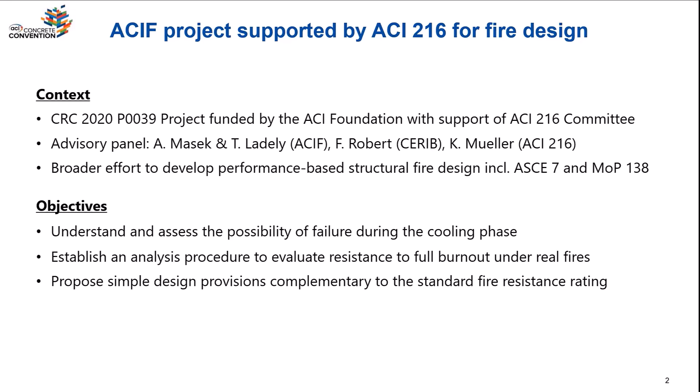So why care about the response during the cooling phase? This is a new need arising from the emergence of structural fire engineering, because real fires include a cooling phase.

Most specifically, in performance-based structural fire design, the first step is to define performance objectives for the design. That's a change in paradigm: we're not just taking a deemed-to-satisfy solution, but talking with stakeholders, the building owners, in defining what is the desirable performance of the structure. We can have different types of performance objectives, including survive to full burnout, or even being reused after a fire, and some resilience objectives.

At the same time, we recognize that failure during cooling can happen. That's true for any type of building material, primarily because of delayed heat transfer. There are other effects too: strain reversals, further degradation of strength, etc.

Primarily, once the heating stops, the inside of the sections, the core of the structure, will still continue heating for a while, and so the load-bearing capacity continues to decrease. We've observed in real fires some structural collapse during the cooling phase.

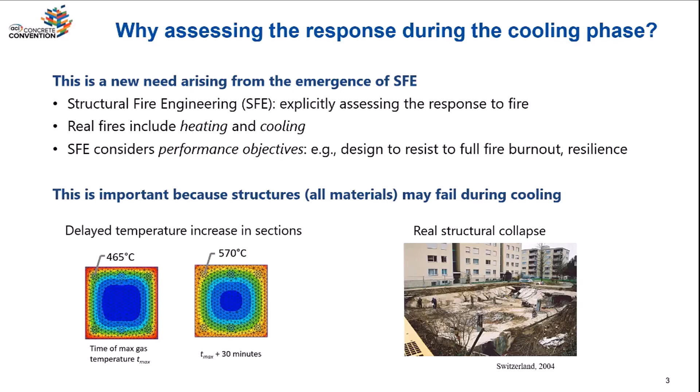So what do we need for this assessment of behavior during cooling? First, we need to start collecting data on the properties during the cooling phase. For a long time we focused on elevated temperature properties, but now we want to know also the residual properties after cooling - this has already been done to a certain extent - but also the properties during the cooling phase, for which we don't really have data.

So we need new experimental protocols, and material models and provisions that we can use in our numerical simulations. We need data on the response of members during the cooling phase, so we can use simulations, when we have the material data, to model the structural response throughout the fire exposure.

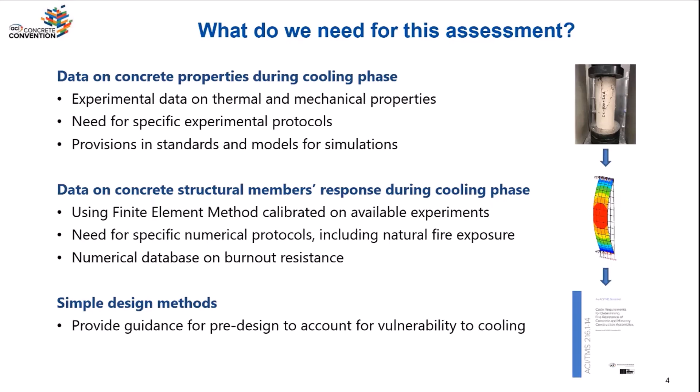With that, we can collect data on burnout resistance, which I'm going to define in a moment, and then look at simple methods or pre-design tables that would give provisions for addressing the vulnerability to the cooling phase for achieving burnout resistance. So in the first phase, we started with experiments collecting those material properties.

We looked at different concrete mixes and designed two types of tests. The first focused on thermal properties - we wanted to measure thermal diffusivity during heating and cooling. Then we also looked at compressive strengths.

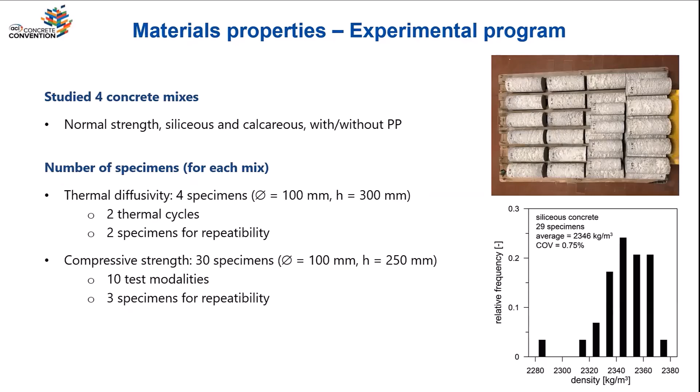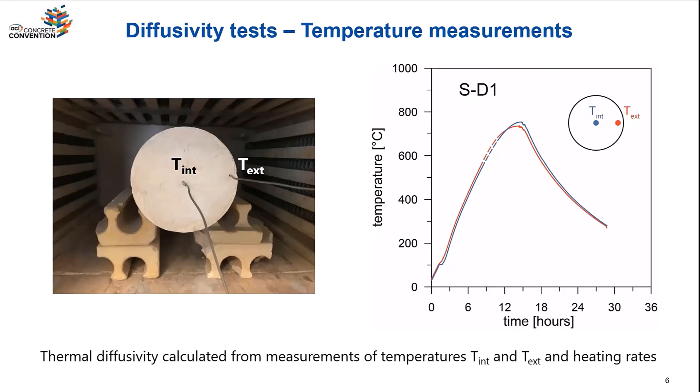For the thermal test, we looked at measurements of temperature in concrete cylinders. By measuring the temperature at two locations inside the specimens, and looking at the conduction problem there with axis symmetry, we could derive the thermal diffusivity. What was important here was to monitor closely what was happening not only during heating, but also during cooling. Thermal diffusivity is a material property that includes conductivity, specific heat, and density, and is the key driver of conduction in the material.

This plot shows the outcome of those thermal diffusivity measurements. On the left part of the plot, all this part is the heating phase, up to this vertical bar. You can see those curves relate to different specimens.

So we measure the thermal diffusivity continuously during heating. And then here on the right-hand side, you have the results when we return back to ambient temperature. So a couple of things we can see here. We have those big peaks, linked to moisture effects around 100 degrees C, and here it's the effect of quartz. So these are already known.

And in heating, you have provisions in standards, notably in the Eurocode, there are two curves that bound the behavior. And so we see that the trend basically follows these laws. It's not exact, with some variability, but overall what is in the standard captures the variation of thermal properties during heating.

However, what was new was this right side of the plot, and what we found was that the thermal diffusivity was irreversible. We didn't have the same type of variation during cooling that we had in heating. Basically, the curves are almost horizontal, meaning those thermal properties are not recovered. They keep the values they had at the maximum reached temperature.

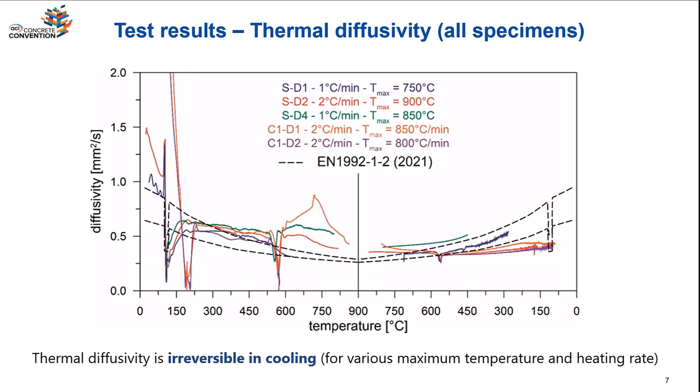So next, experiments dealt with compression tests, compression strengths. The test protocol that we devised included defining two important temperatures for concrete cylinders. The temperature Tmax is the maximum temperature that we will reach during the heating of the specimen. And then the temperature T-test is the temperature at which the test is performed.

So if you look at the column at the right here in this table, this means we'll take concrete cylinders and heat them to 600 degrees C. Some of them we will test at 600 degrees C, so that's the elevated temperature measurement as is usually done. But others we will heat to 600 degrees C, wait for a while, cool down to 400 degrees C, wait for the temperature to stabilize, and test at 400 degrees C. We do the same at 200 and at 20, and 20 is the residual strength measurement. So that we track the loss of strength during cooling and the residual value.

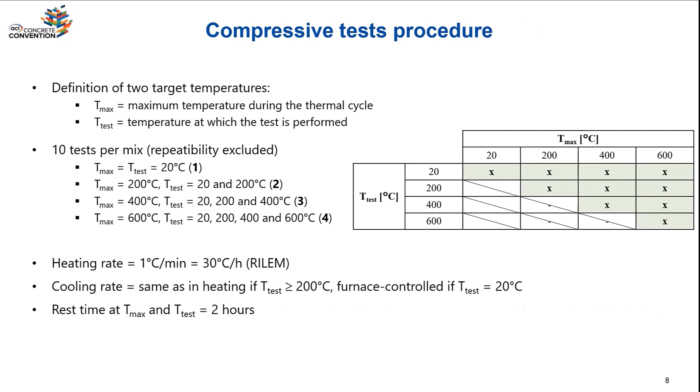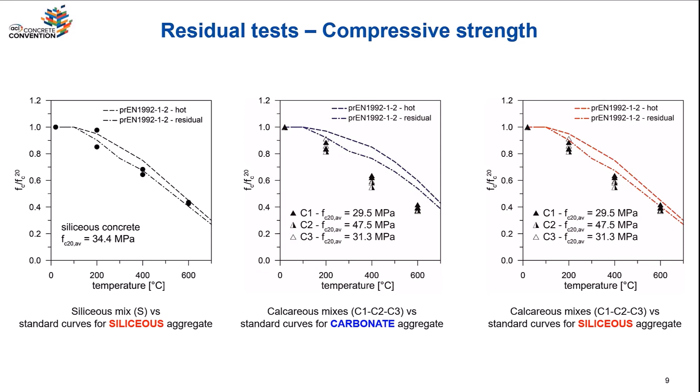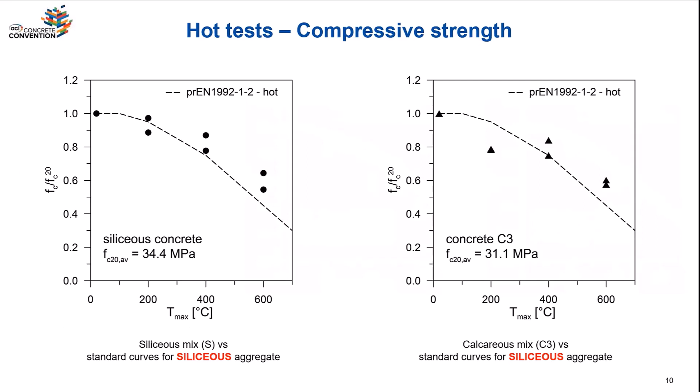So these measurements are the hot measurements at 600 degrees C, and then we are cooling and measuring at 400, 200, 20. You see again that the residual strength at 20 is lower than the hot value, and that's true for all specimens. But you see that the trend while cooling is not really consistent, or we couldn't find any real logical trend between the different mixes. So we always had further degradation of strength, but it was not a linear process.

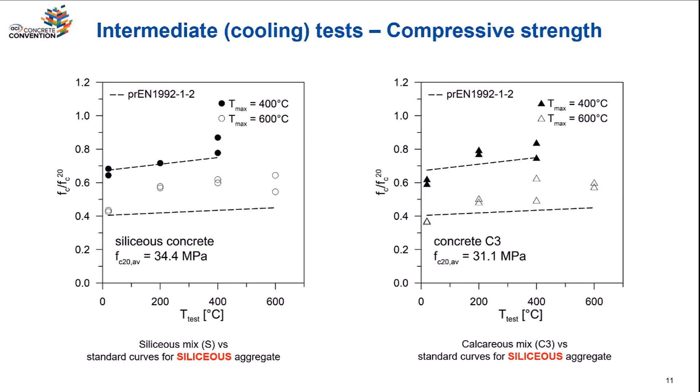So on the experimental program, the main takeaway is that the thermal properties in the heating phase are fine with code provisions, but in the cooling phase we should consider them irreversible. So if you do a numerical simulation, you should keep the value at the maximum reached temperature, not at the current temperature while cooling. And for compressive strength, the residual value is lower than the elevated temperature value.

We have additional strength degradation during cooling, and we believe for the first time we had measurements during the cooling phase at different intermediate temperatures. More research is needed to understand really what was going on, we didn't find a really consistent trend.

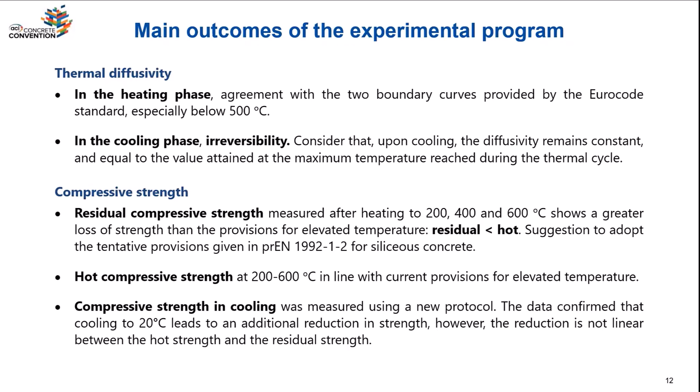Moving on, next we wanted to simulate entire concrete members during heating and cooling, and the way we framed the question was to determine what we call the burnout resistance. So here is what we wanted to do: if you consider a reinforced concrete column in a furnace, traditionally we heat it up to a certain time when it fails, and that's what we call the standard fire resistance.

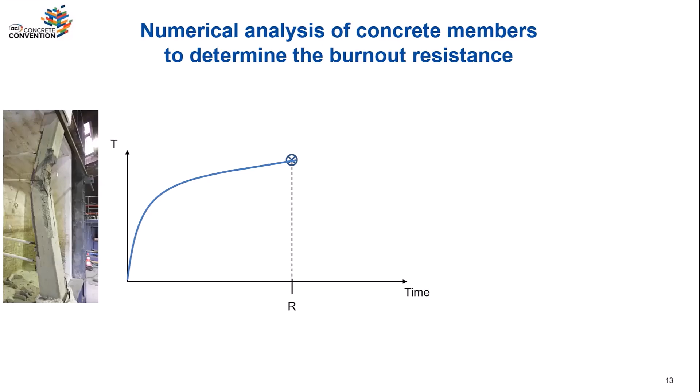The question we want to look at is, should we stop the heating earlier but keep the load applied on this column? We stop at a time earlier than standard fire resistance, and then there is a cooling phase. Would the column survive or fail? We want to repeat this analysis for different values of DHP, duration of heating phase, and differentiate between the fires that lead to failure and the ones that are survived.

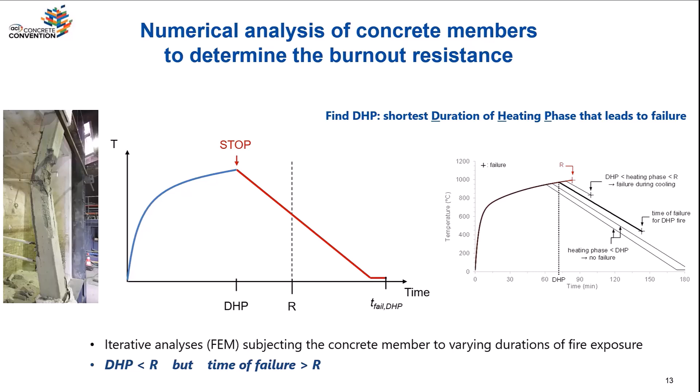To do this systematically, we adopted what we call a standard natural fire exposure. That's not the full performance-based design where each fire depends on each compartment, taking into account the fuel, etc. Here we want something systematic, so we always heat with the same time-temperature curve, and then we have a linear cooling phase.

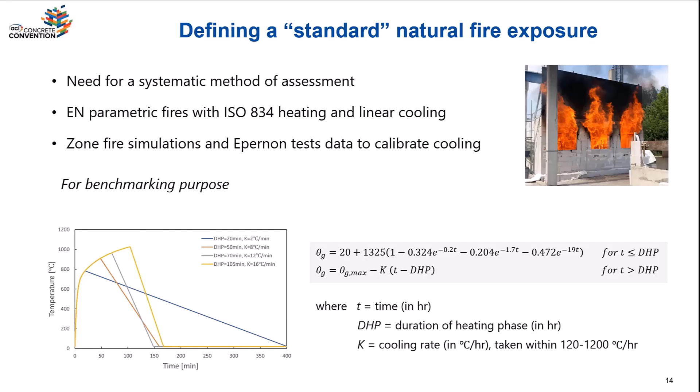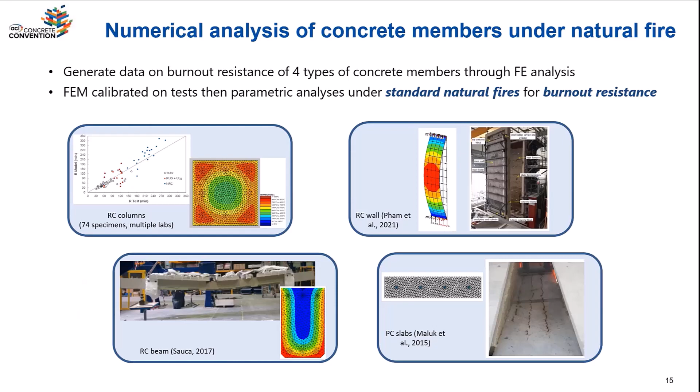By subjecting different members always to this type of standard time-temperature curve, but with a cooling phase, we can benchmark and compare the vulnerability to the cooling phase. We applied this numerical method to different types of concrete members: columns, walls, beams, and slabs. That was all in the context of this research project. I'm not going to go into the details for all, but let me show you an example for concrete columns.

What is key is that we modeled this concrete column with the finite element method, and we subject it to heating followed by cooling, studying different durations of the heating phase. What we call DHP is the shortest duration of heating phase that results in a failure. It's basically the threshold of thermal exposure such that the column has been subjected to so much thermal exposure that it will fail eventually.

What we found, because of this delayed heat transfer, is that when you enter the cooling phase, the core of the section continues heating even though the perimeter starts cooling. So what we found is that there is approximately a linear relationship between the burnout resistance and the fire resistance. In other words, if you have a concrete column which has a 90 minutes fire resistance, it would fail eventually if you expose it to the heating phase for 63 minutes or more.

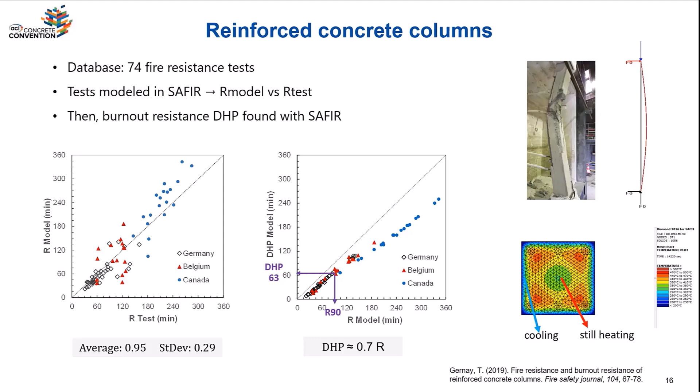This kind of gave us a framework to systematically quantify the vulnerability to cooling and differentiate between those fires that result in failure eventually and those that are survived. We did lots of simulations varying the cooling phase and so on, looking at those different members.

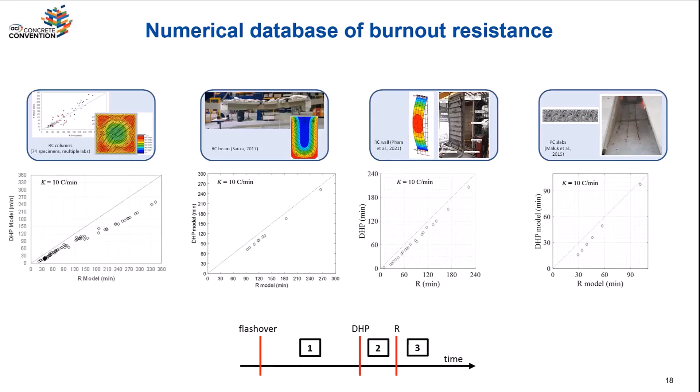I'm going to skip that, but conceptually, what we want is to divide the time domain into 3 zones. Everything shorter than DHP, for this standard natural fire, is going to be survived indefinitely. If the exposure to this particular standard fire lasts for more than DHP, the member is exposed to so much heat that it will eventually fail. And then once we reach standard fire resistance with this particular exposure, it has already failed.

As the last part of the project, we looked at the current tabulated data in ACI 216, and we looked at what it would mean if we had to adjust those provisions for thickness, for cover, to make the members survive to full burnout, and not only for a specific fire resistance time.

As an example here, for the thermal insulation criteria of concrete floors, you have a table that gives minimum thickness in ACI for different durations of standard fire rating. So we can model those floors in a finite element model, now using the material properties from the experimental task that I've shown.

We can look at how the temperature on the unexposed face continues to increase for a while during the cooling phase, and then eventually cools down. By repeating these analyses for different thicknesses of the floor, we can find the minimum thickness such that this maximum does not exceed a limiting temperature.

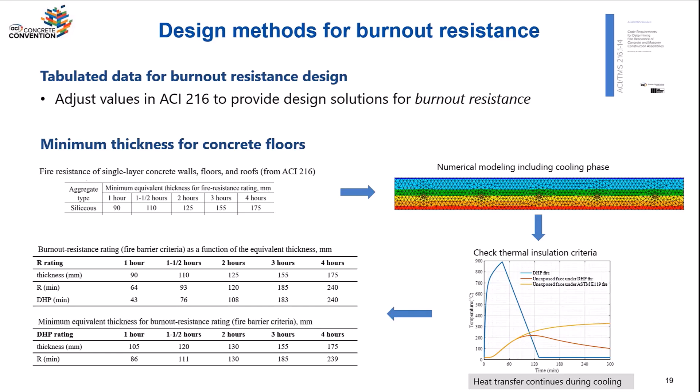For example, we can relate it to the values in ASTM E119. With that, we can adjust the tables and give the thicknesses to achieve the same limiting criteria, but now including the cooling phase.

We can do the same for cover, looking at stability of members, and we've done that also in a provided table. I'm going to go fast on this, but we've published the report now because the project has been completed.

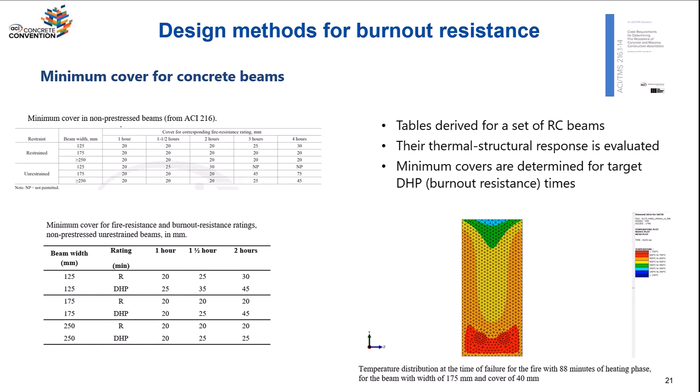I want to relate that to performance-based fire design, which is the topic of this session. Some aspects of the project are directly related, and in some areas we leaned more toward the prescriptive approach to make it practical and to raise awareness of the effects of the cooling phase. The first step in a performance-based design is to determine the performance objectives.

In many cases that will entail explicitly evaluating the response throughout the fire, including cooling. We believe the thermal and mechanical properties we provide in this project will be very helpful for that. The second step is to determine design fires.

In this project, I want to make clear that we did not work with a specific fire that would occur in one given compartment, modeling the fuel, ventilation, and so on. That was not the objective. Instead, to have a systematic approach and allow comparison between members, we adopted a standard natural fire, which is somewhere in between the standard ASTM E119 fire and performance-based design, because we do have the cooling phase. But this is not really a full performance-based design in that sense.

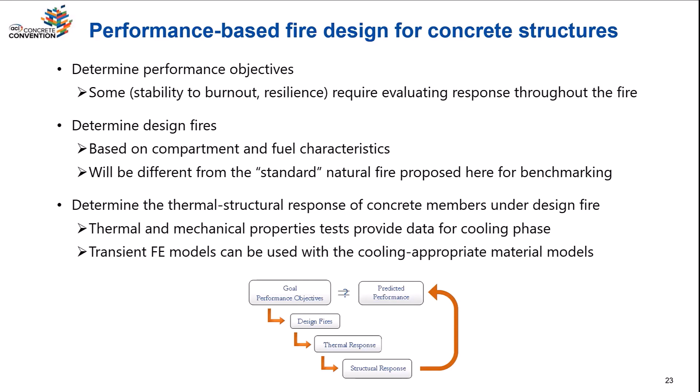What's interesting is that we show the procedure to quantify the response of structural concrete members during the different phases of the fire, notably to quantify burnout resistance, and that can be adopted with any design fire. In conclusion, we have shown new properties during cooling.

Thermal properties should be considered irreversible, and compressive strength further degrades during cooling compared to the hot value. We have shown a systematic procedure to assess resistance to full burnout for different concrete members. It's important to remember, probably the most important thing, that any type of structural member is vulnerable to failure during cooling, regardless of material or member type.

We can quantify the burnout resistance, which will be shorter than the fire resistance. The time of failure will be later, but the duration of exposure to fire will be shorter.

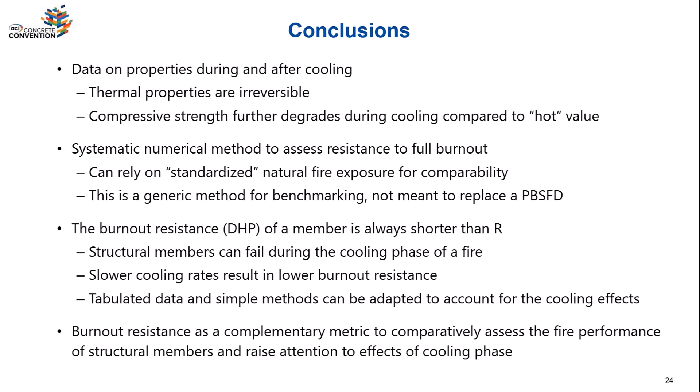Thank you for your attention, and if you have any questions, I'll be happy to take them.

We have a question in the Zoom: I was wondering if the cylinders were loaded before exposing to temperature. Can you say that again? The question is whether the cylinders were loaded before exposure to temperature. No, they were not.

Okay. Yes. So with all of these tests, were you accounting for or recording the moisture condition for the cylinders and the oven testing, but also in the full scale testing? Were you detailed in the moisture content values for those, and if so, how did you quantify them? How are you reporting them?

Thank you. About the testing of the concrete cylinders, that followed the procedure specified by RILEM in terms of storage condition and monitoring of moisture during storage for a certain duration. I don't recall the exact conditions, but there was a first 7 days at a certain moisture condition in the room, then 3 months at other conditions, and so on.